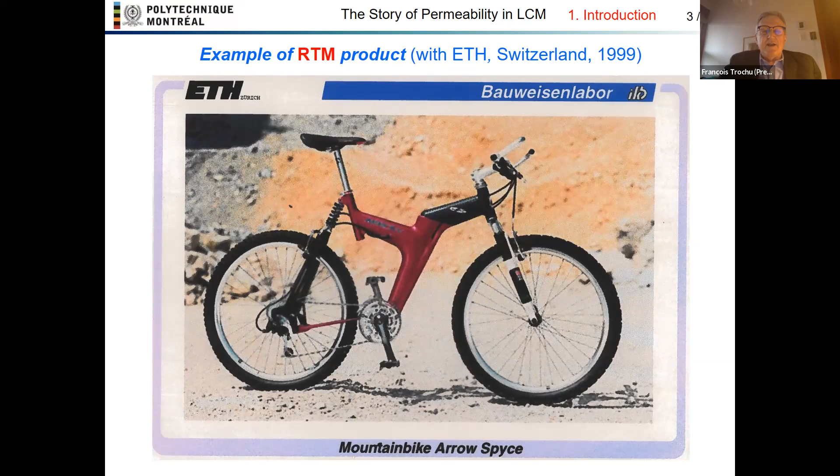Another example of a part made by RTM is this beautiful mountain bike frame, made out of carbon fibers, with the extremities here in glass fibers. This was done in collaboration with ETH in Switzerland in 1999. So let's start a little bit with philosophy, because what we always try to do in research is to model from experiment.

So the first step is observation of the phenomena. Afterwards, numerical simulation is supposed to help us validate the model and also to predict. So we come back to experiments.

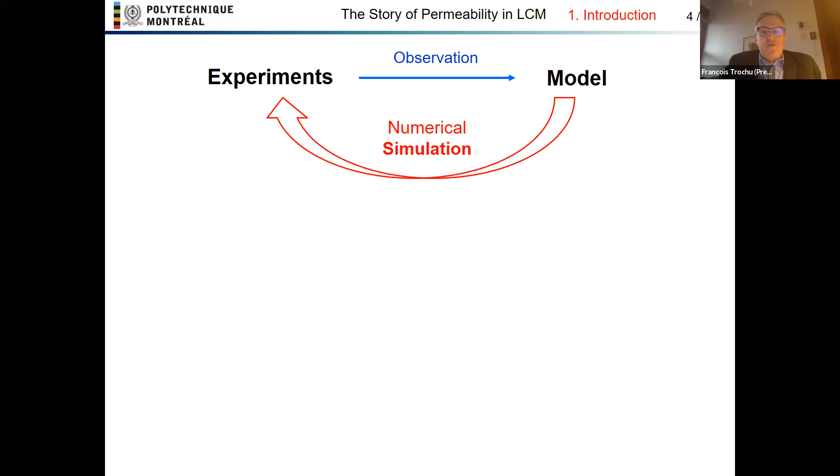So how are we going to proceed to simulate mold filling in liquid composite molding? Well, first of all, we have a mold here, schematically depicted like that. At a given time, we inject at a given pressure or prescribed flow rate, and we have an impregnated domain at a given time.

To simulate mold filling, we need to have a model. The first model that was used successfully for this work is Darcy's law. Darcy's law enables us to predict, at each time step, the shape of the flow front and its progression in time during mold filling.

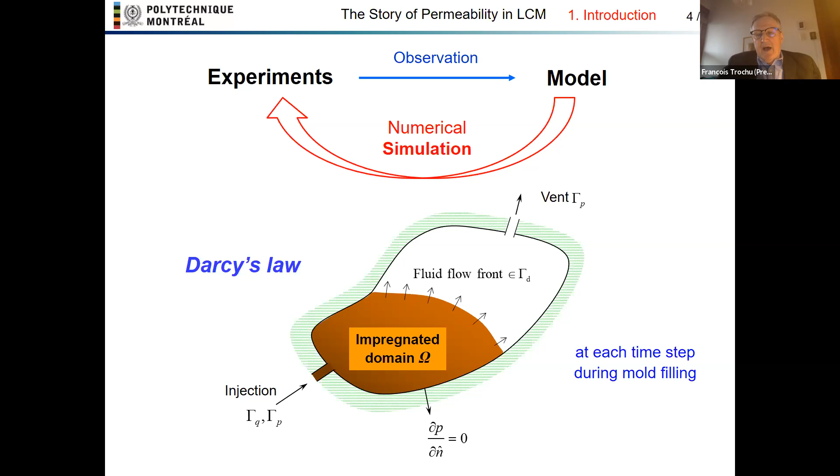Now, how are we going to present today this concept of permeability? First, we will talk about process permeability, which is different from the classical permeability - a saturated concept of permeability used in Darcy's law, especially in groundwater flows.

We will also see how this concept can be adapted to different LCM process variants, with the goal of establishing a systematic connection of permeability with process simulation, which is so important for software validation.

The background of this work is actually 30 years of research on LCM since 1990, with the previous 10 years since 1980 on groundwater flows. This is really my personal background, which I'll try to sum up in a short presentation today. At the same time, we'll try to better understand the principles that govern successful applied research.

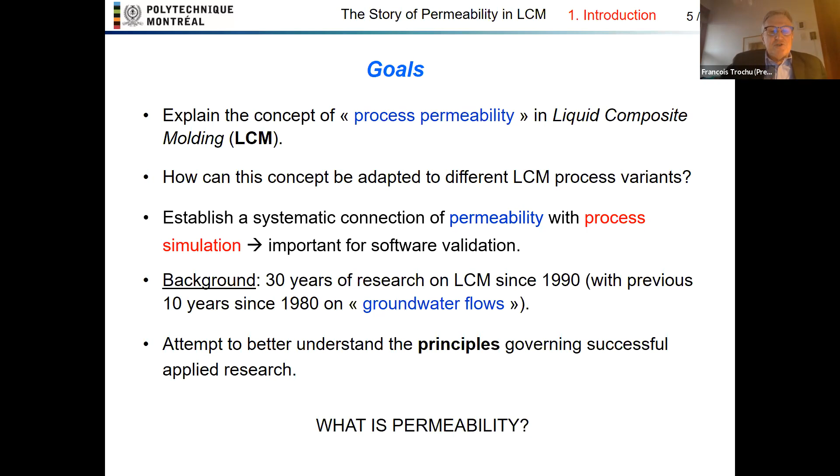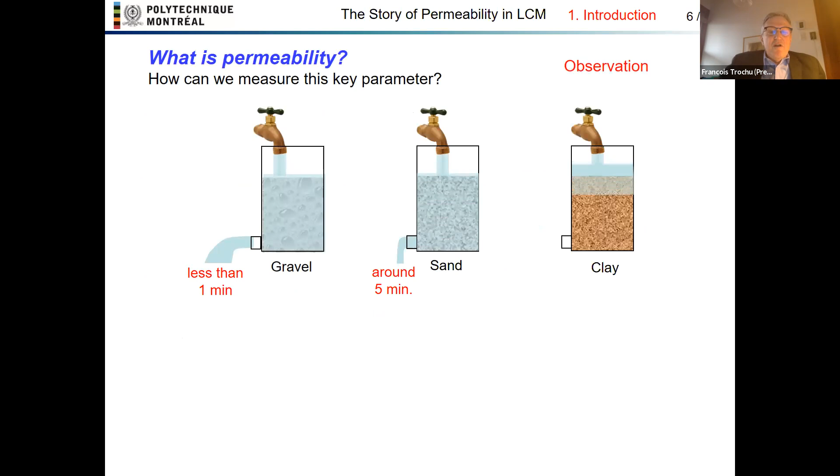So what is permeability? Permeability is a parameter that depends on how quickly you can fill a porous material. For example, gravel can take 1 minute, sand about 5 minutes, and clay a week or even more. All these factors depend on the pore size.

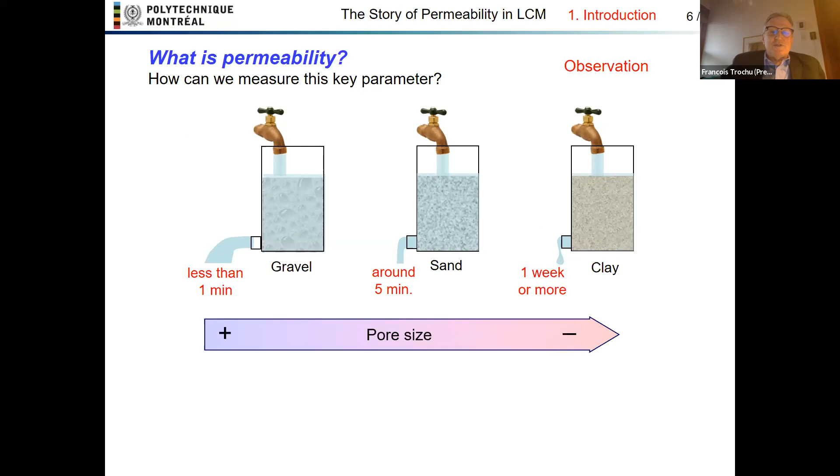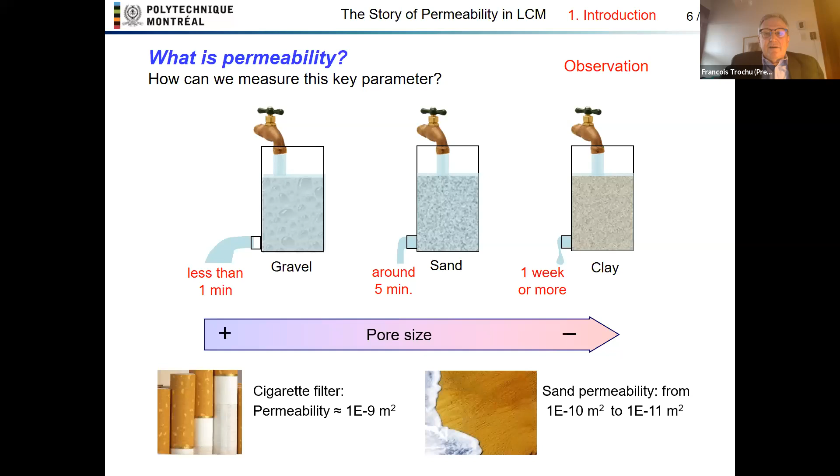You can also consider permeability when air flows through a filter, like a cigarette filter, for example. The order of magnitude of these permeabilities ranges from 10⁻⁹ square meters to 10⁻¹⁰ and even 10⁻¹¹ in the case of sand. So permeability is really connected with flow area - that's why it's measured in square meters.

Now, the outline of the presentation: we will first present Darcy's law and the basic facts connected with this fundamental law in porous media. Then we'll present the different versions of process permeability, like rigid permeability for 1D flow, the extension to 2D in the case of an anisotropic preform, together with some software validation. We will recall the benchmark 1 and 2 results.

Then we will extend this concept of process permeability to vacuum-assisted resin infusion, or what we call direct infusion - the concept of flexible permeability. Each time I will show some software validation. Then we will talk about Kz, through-thickness permeability, also with 3D software validation.

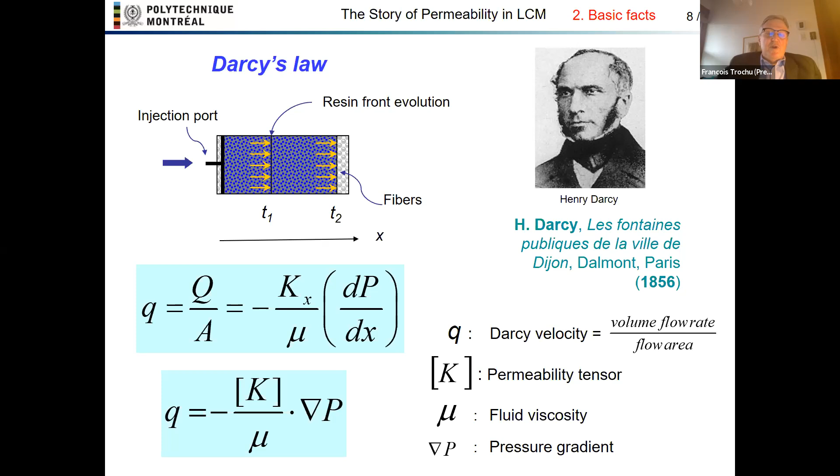Actually, this law can be generalized in vector form as follows, where Q is a vector, K is a tensor, a 3x3 tensor, mu remains the fluid viscosity, and nabla P is the pressure gradient.

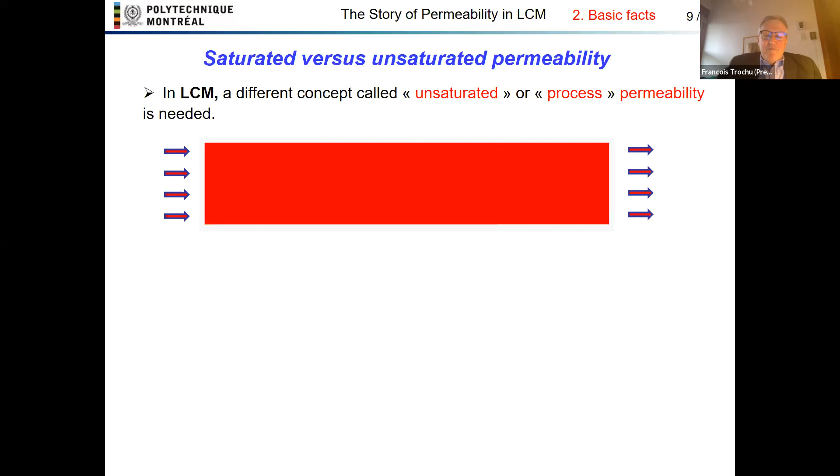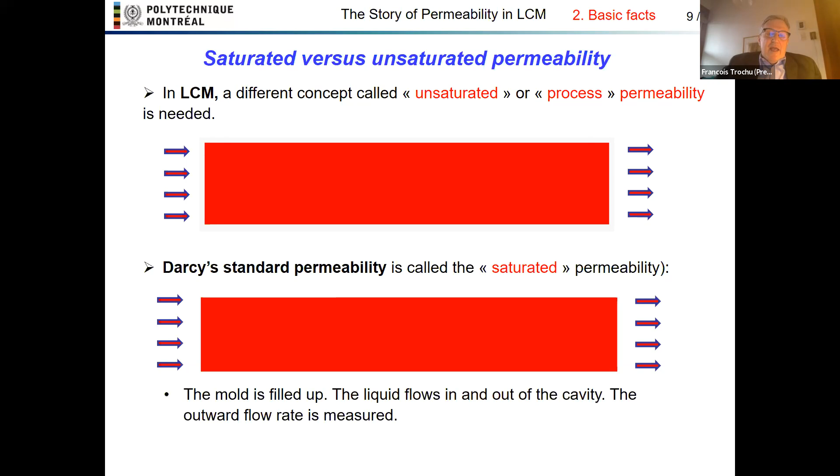So the concept of permeability here that we call process permeability is actually an unsaturated permeability, because we want to measure what happens when we fill a mold. Whereas most of the time, the standard concept of permeability is a saturated permeability, where the mold is full, and we want to study the flow rate - what flow rate comes out or gets into the mold over time. The outward flow rate is very often measured when we want to talk about saturated permeability.

So how can we measure process permeability? There are several methods that were devised over the years. The first one is the simplest approach: the unidirectional method, where we inject a rectangular mold in time.

A lot of people wanted to go faster in the case of anisotropic preforms, which is actually most preforms since they are not isotropic. They devised some molds to follow up the flow front in radial injections. So this was also done.

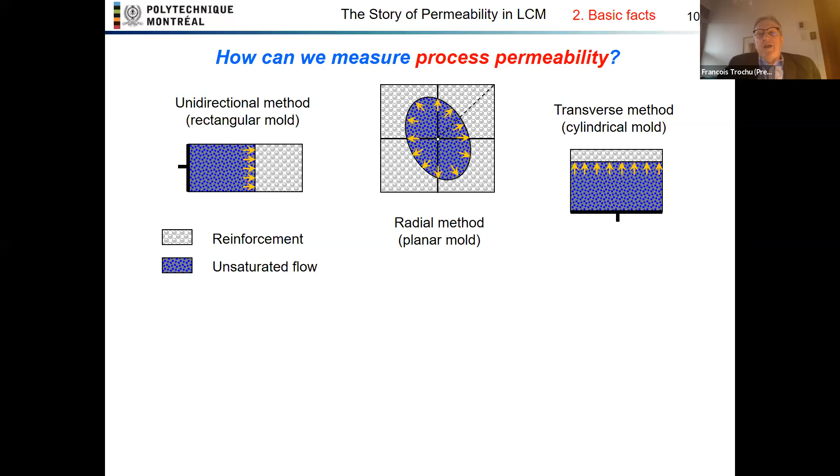In the case of transverse permeability, usually it's a bit difficult to measure the unsaturated process permeability. Usually people work with a cylindrical mold, and we measure in this case the saturated permeability.

So the different concepts of permeability here go from rigid to flexible, and then we'll talk about the connection with preform expansion, and finally apparent permeability in indirect infusion when we have a distribution medium.

So 2D in-plane radial injections, as was just described before, is really a tensorial equation here, where Q is a vector, and we have here the expression of the permeability field, where K is a diagonal matrix, where the first two terms of the diagonal are the in-plane terms of permeability, which we often call Kx and Ky, and K33 is the transverse term.

So this here is the permeability matrix in the principal axis of the flow. What are the principal axes of the flow? We'll have a look in the next slide, but before that, let's look at the case of isotropic materials.

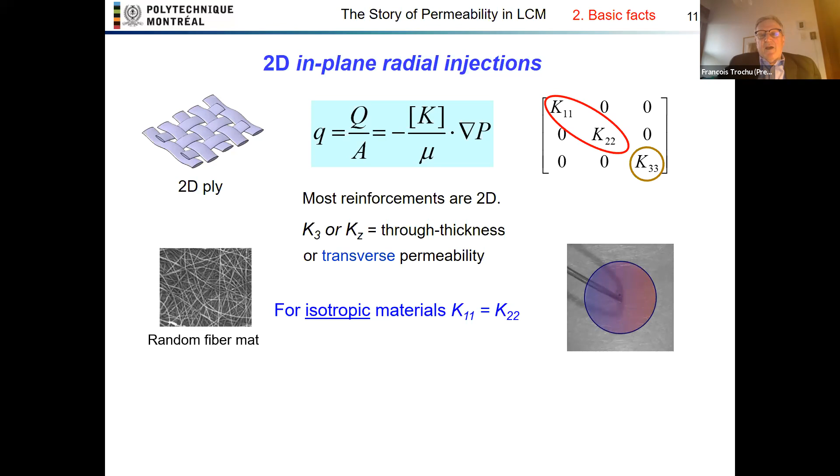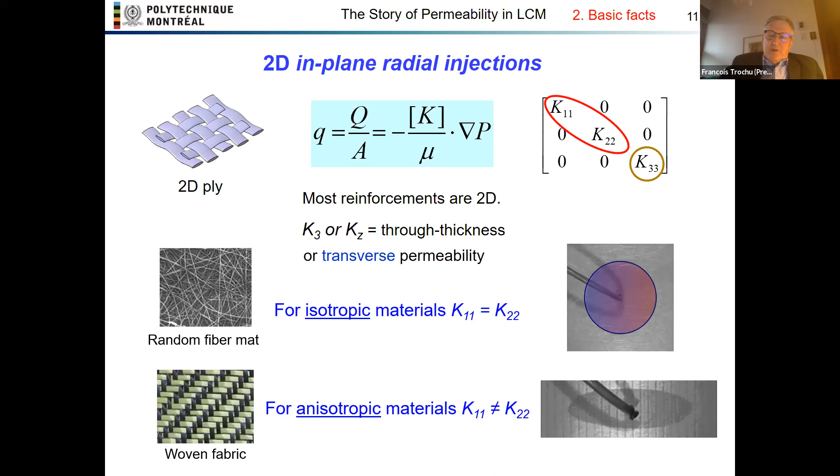For example, random fiber mats: the flow front in the radial injection is usually nearly a circle. In the most common case of anisotropic materials, where K11 is different from K22, then we have an elliptical flow front.

Now, measurement of permeability by radial injection is not easy. We tried a long time ago to relate that to 1D flow, and there are some difficulties, depending on the injection pressure, or especially if we infuse the preform.

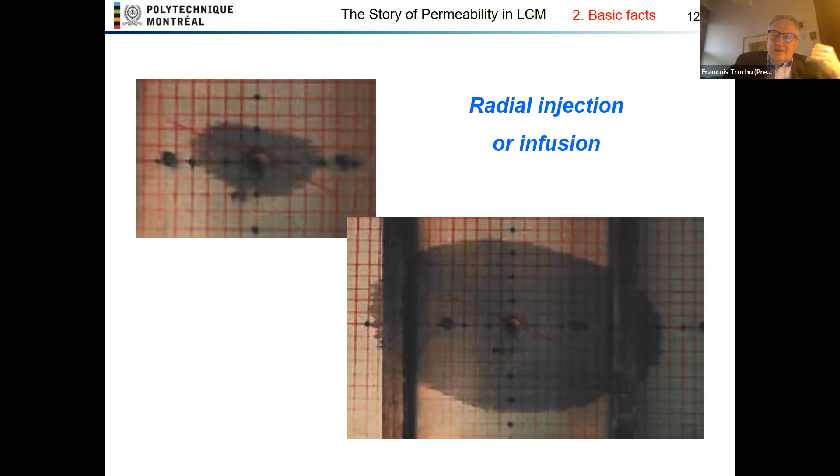At a low flow front velocity, we have a fuzzy shape of the flow front, and it's not even always elliptical, because in this example, for 2 times 80 seconds and 140 seconds, if we try to fit the flow front with a perfect ellipse, we get 2 angles which are quite far apart. The angle beta here is 16 degrees, and here is 28 degrees.

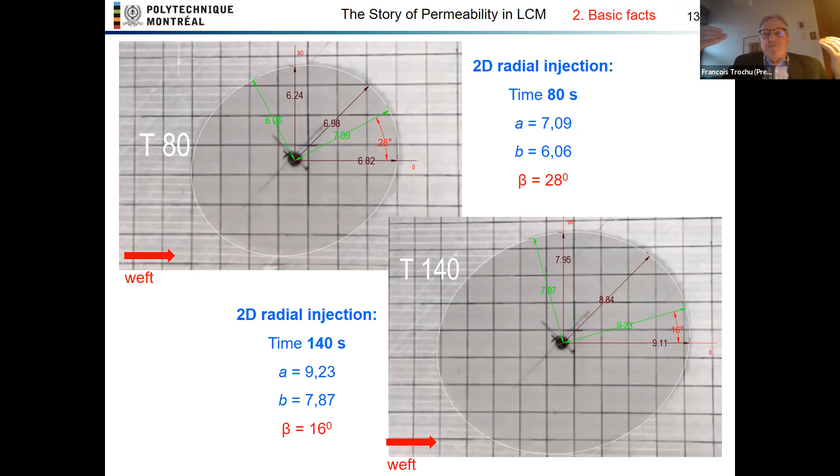So it is not easy from these kind of measurements to get a very good fit. This is mainly due to the irregular orientation of the flow ellipse, but also it is connected to the shape and size of the inlet gate. This was studied in a paper by Professor Gauvin a long time ago.

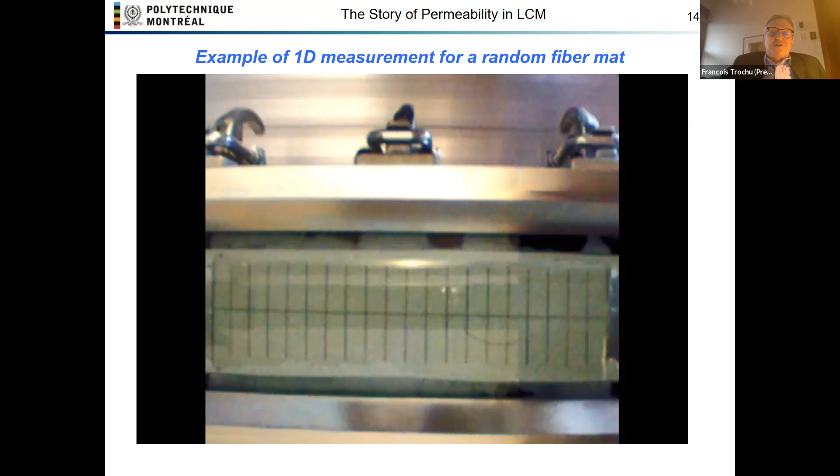So what do we do in our lab to measure permeability is really we rely on the 1D flow approach. In a rectangular mold, we measure the flow front velocity by observing under the glass cover the different crossing times of the flow front with the central line. By doing that, we are able to get reliable measurements, because with the 1D approach, the data processing is simple and robust, and most importantly, we have good reproducibility with fewer sources of error.

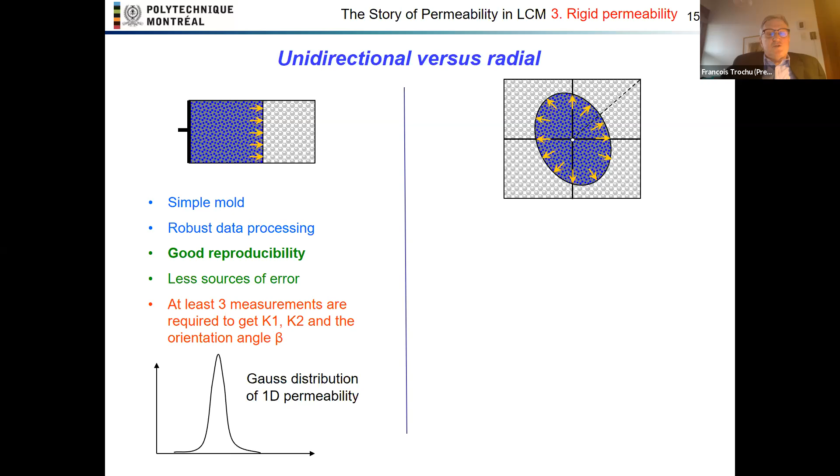However, we need 3 measurements to get K1, K2, and the orientation angle beta of the flow ellipse. But we do get a nice Gauss distribution of the permeability.

Whereas with the radial experiment, it's an expensive tool, and we have complex data processing. The principal permeability can be obtained from 1 measurement, but the reproducibility is not high, and we have also an influence of the size and shape of the inlet gate, so we get a much larger distribution.

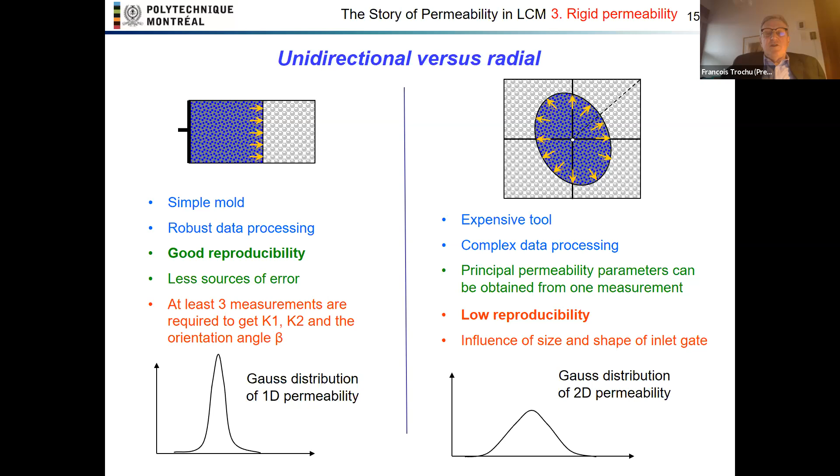We could check that by comparing our results with the results of a colleague who had such an expensive device in a research project a long time ago.

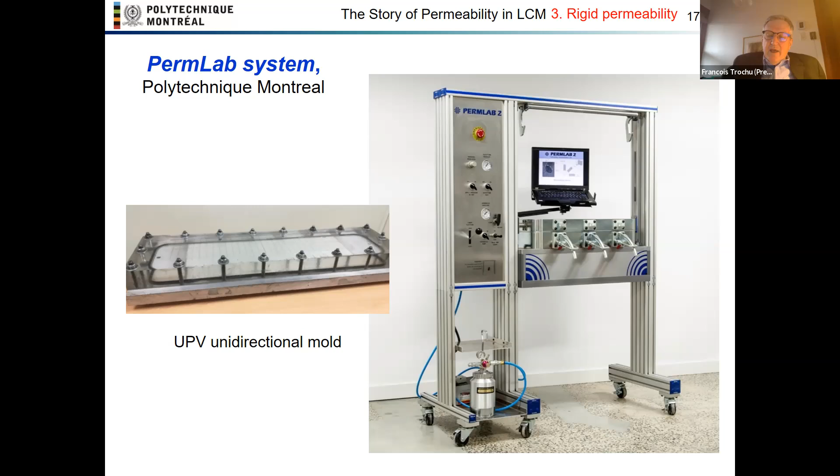So how do we measure? We have a special tool here with a glass cover, and with engraved lines on the glass cover, we can record the different positions in time of the flow front.

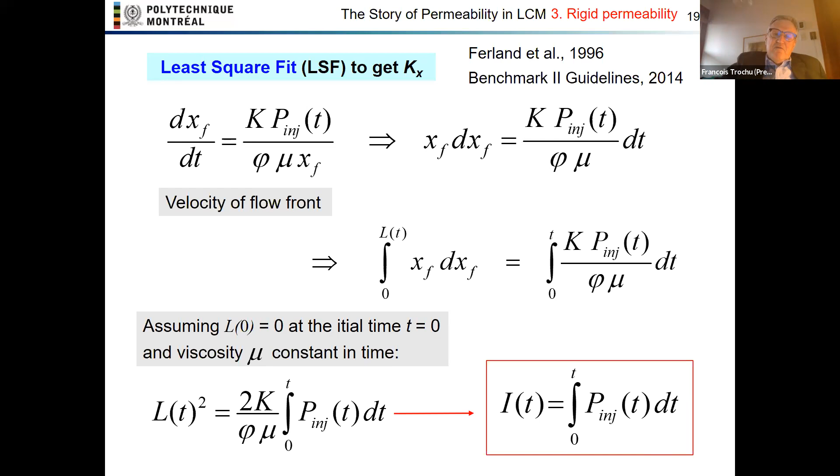I think it can be important, although it doesn't always have a very strong effect. We could neglect that, but we do it. We integrate pressure because when you want to make an injection at constant pressure, you set the pressure pot at the pressure you want, you inject, but the pressure is never always nice like here. There's always a small delay before you get the set pressure.

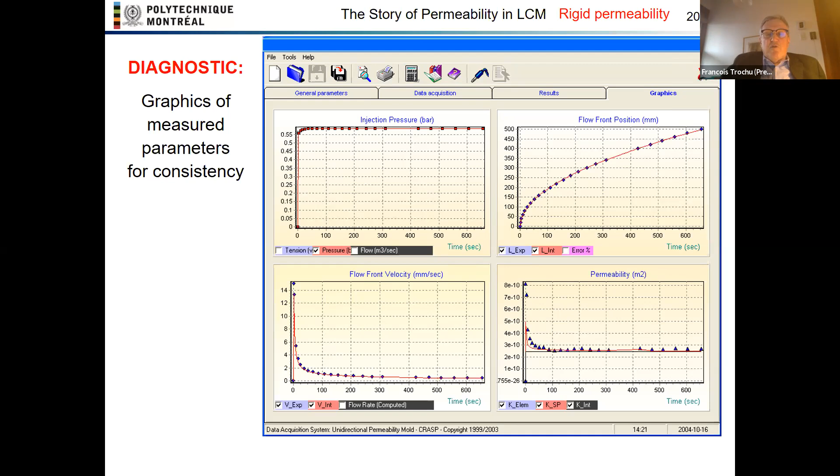And then at each position of the flow front, you can calculate permeability here. So this is permeability here.

Now, this permeability, the line that is here, is called the least square fit. And it's with this value that we calculate, in red, the position of the flow front. If it matches with the experimental positions, we can safely consider that the experiment was okay. So it's a built-in check of the measurement in 1D.

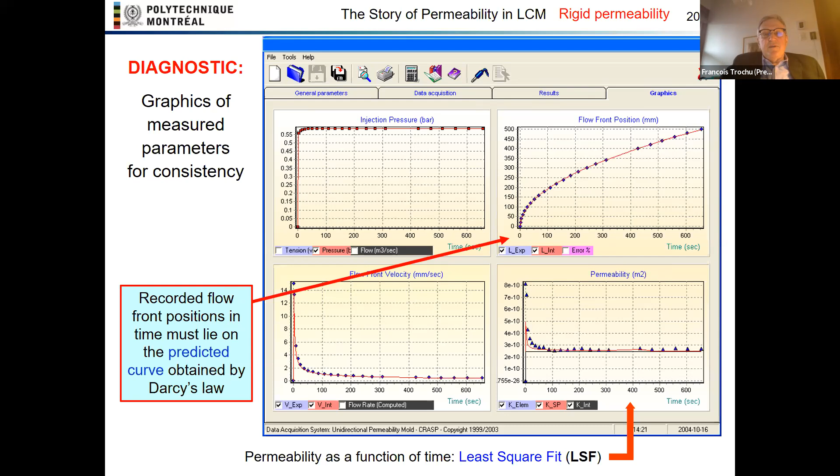Afterwards, when we simulate, we can also work with equivalent saturated permeability, like in a planar crack of thickness D, it's D squared over 12, or the classical Poiseuille tube of radius R, where the equivalent permeability is R squared over 8. Naturally, there are many equivalent formulas for different kinds of runners.

In the past, these two values were very helpful for us. We didn't really need to go to much more complex terms. Anyway, so this is the way we measure permeability.

In the end, we get a model of permeability as a function of fiber volume content, because when we change the thickness of the preform, permeability is a decreasing exponential function of VF. So a very small change in thickness will create a significant change in the value of permeability.

And this is the kind of experimental model that we get of permeability as a function of fiber volume content VF.

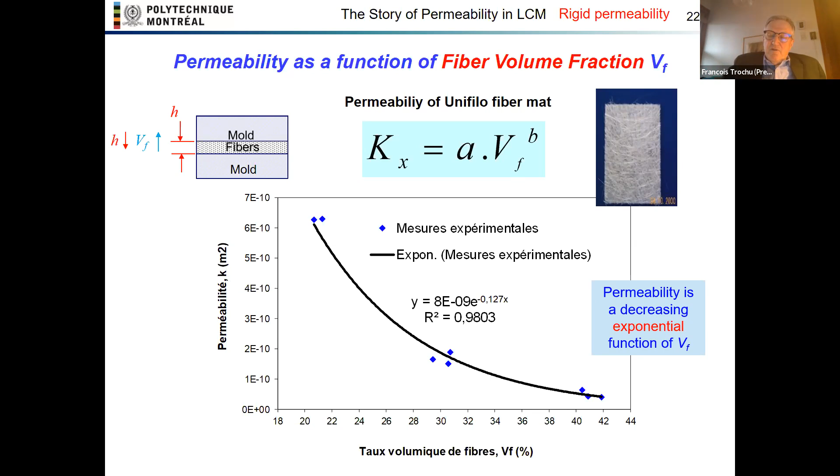Now, just to show a validation of this measurement in 1D, these are our old results, not published actually, that were obtained after measurement of permeability in a 1D mold with obstacles.

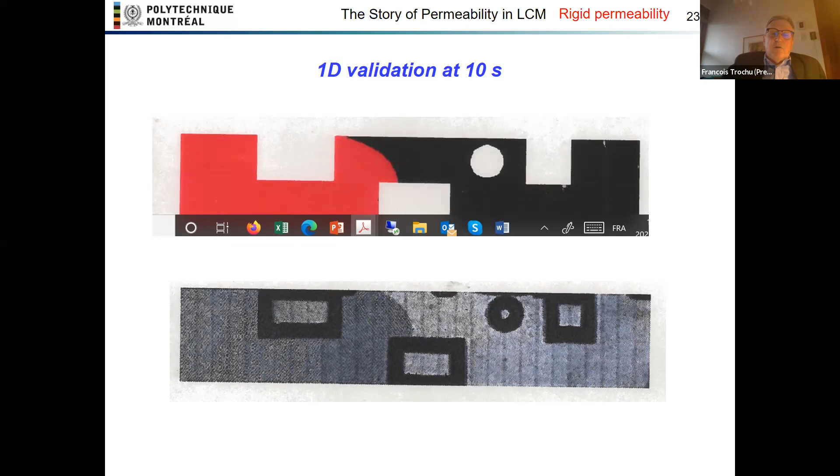So at 10 seconds, at 13 seconds, and at 14 seconds, we are really able to reproduce the shape of the flow front in time, provided that we can control the edge effects along the edges of the mold, along the edges of the obstacle here.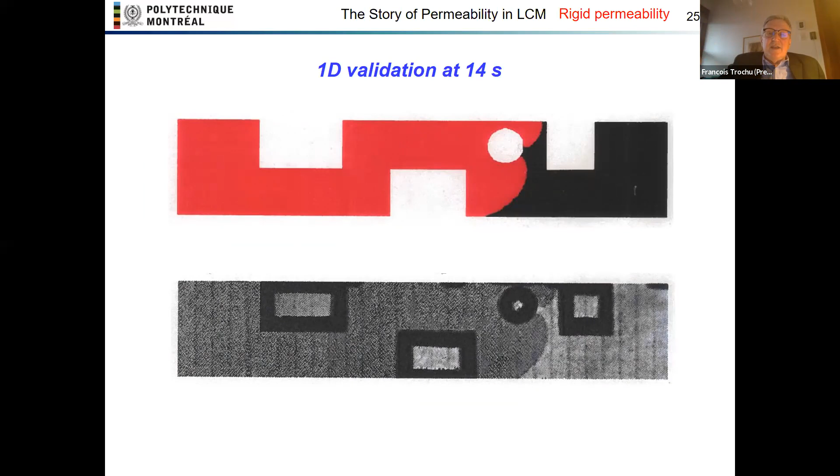So there are some experimental techniques to do that. We have to master them in order to provide this kind of validation.

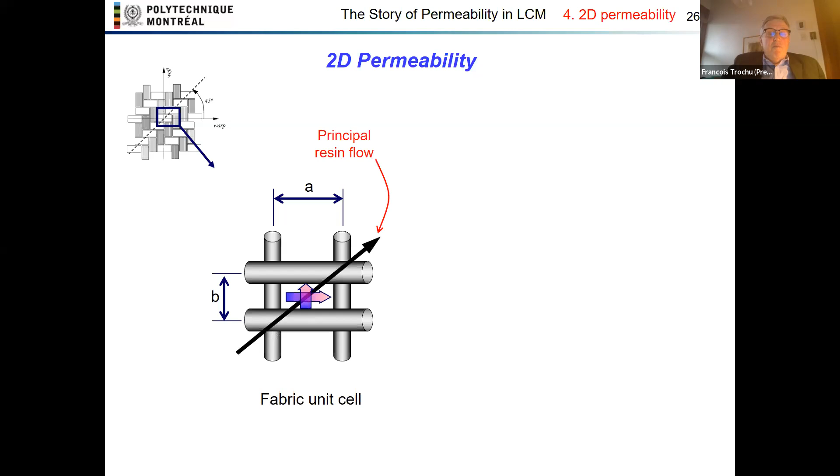Now, 2D permeability is quite simple. We have a preform with different fibers along the X and Y axis. And the flow front actually will not follow the axis of the weft and warp.

It will be at an angle beta with respect to one axis. And then we have an ellipse with K1 and K2 and this angle beta.

And the way to measure this 2D permeability is simply by performing 3 measurements along 0, 45, and 90 degrees to identify the ellipse. So how do we do that?

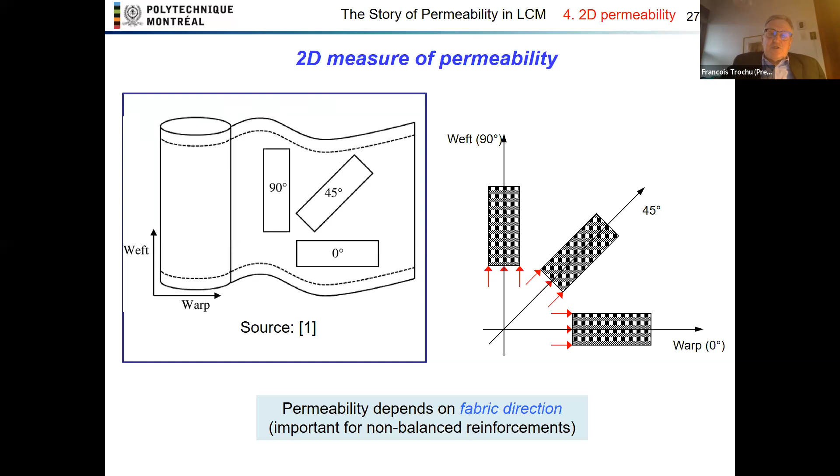Well, we follow the proposal, the work in this reference article from 2007. And from the 3 measurements that we perform along 0, 45, and 90 degrees, we have enough information here to identify the permeability ellipse and to get K1, K2, and beta.

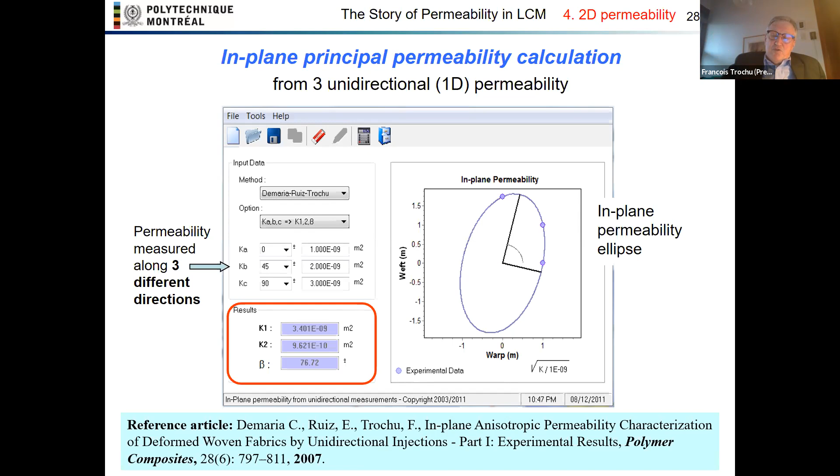So we've been doing that for years now, together with many industrial partners. It's a kind of procedure that is well validated now.

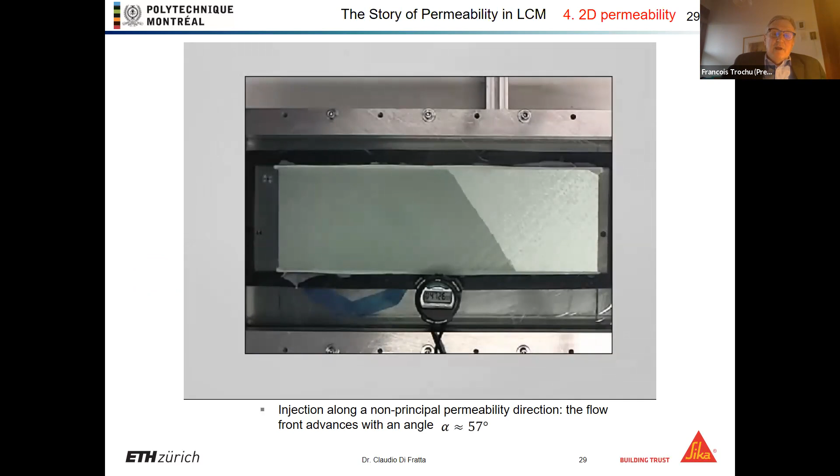Now, one interesting example here I want to show of anisotropic permeability is when you want to inject a 1D reinforcement with an angle, you don't get a straight vertical line, but you get a straight line with an angle. This angle here is 57 degrees. Knowing this angle, you can proceed faster to get the permeability anisotropic values. You just need 2 measurements instead of 3. Anyway, this was published in this article.

I think it's not easy to get this kind of flow. Really, it demonstrates the good understanding and mastery of Claudio Di Fratta, who was a PhD student in Switzerland, in Zurich, a long time ago.

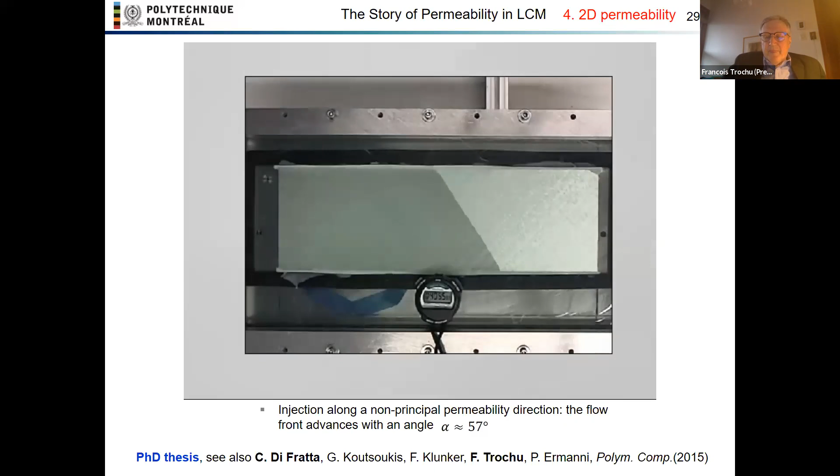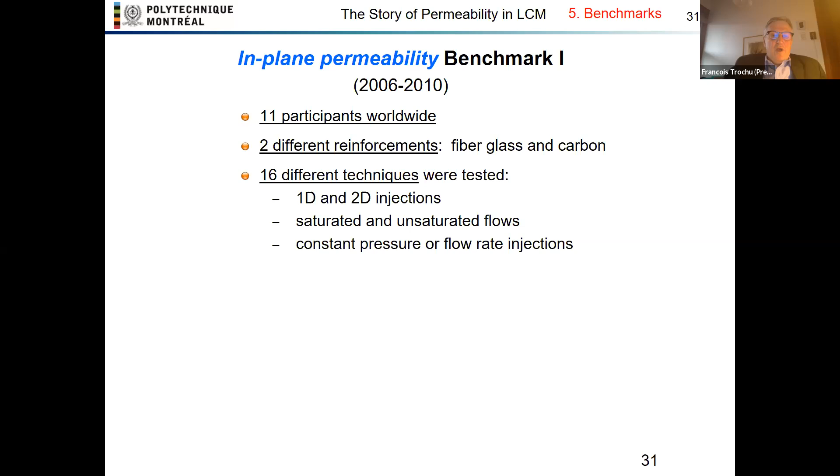Okay, now let's move to the benchmarks on permeability. There are 3 benchmarks actually. I will talk mainly about the first 2. The first one, there were 11 participants, 2 different preforms, and 16 different techniques were tested: 1D and 2D radial injections, saturated and unsaturated flow, constant pressure or constant flow rate injections.

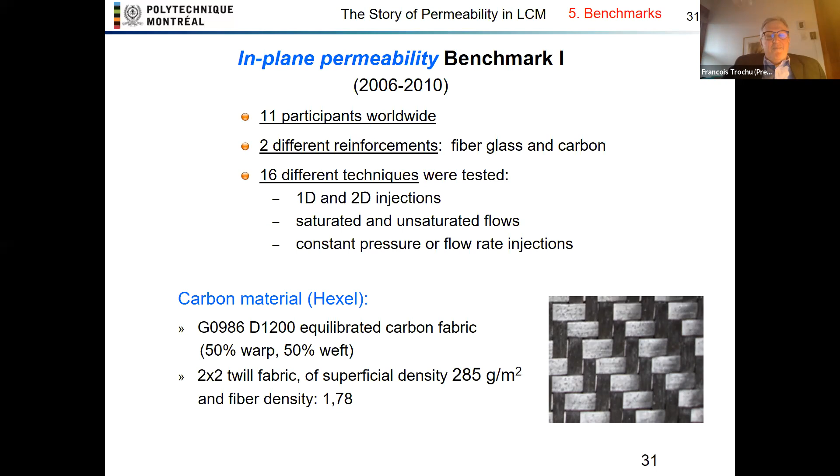This was the preform. One of the 2 preforms was a carbon G0986 from Hexel, okay, which was an equilibrated preform. However, the fabric structure made it anisotropic. And here are the results of benchmark 1 here.

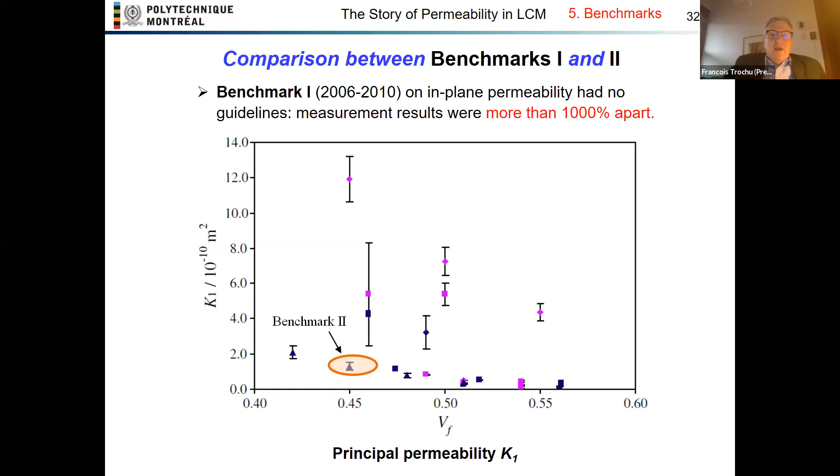You see the benchmark 1 results. Compare with benchmark 2. Okay, so why such a difference? Well, it took 4 years to complete benchmark 1. However, benchmark 2, with 13 participants, supported again by Hexel, took 3 years to complete the work with all the different universities.

Here are the 2 universities where I'm working, actually, collaborating also with Spain here. The guidelines, okay, were adopted by all participants, nearly all, actually. A rectangular mold. We wanted to have a length over width larger than 3 and check that we don't have, let's say, more than 2% of change here in thickness.

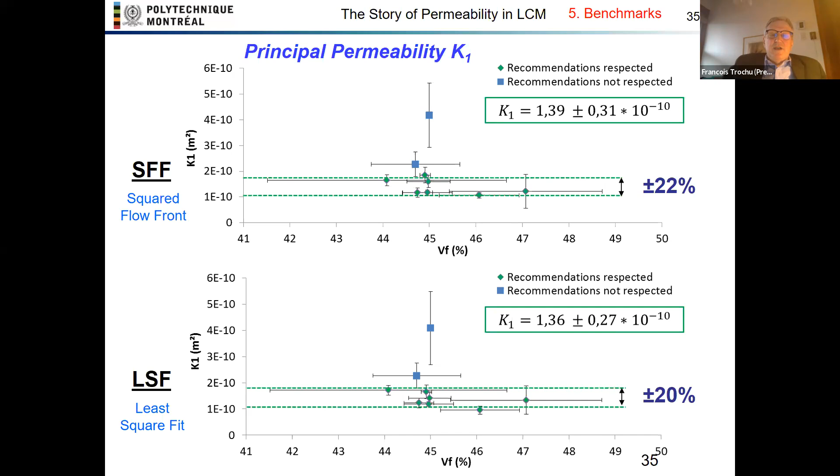And we performed 3 measurements according to the article, and we follow the guidelines actually described in this article of 1996. Now, the results of benchmark 2 are here. I just presented the least square fit here before. The least square fit results are apart, plus or minus 20% apart, compared with a 14 times difference with benchmark 1. However, there are some participants here who are not in this range because they could not respect fully the guidelines.

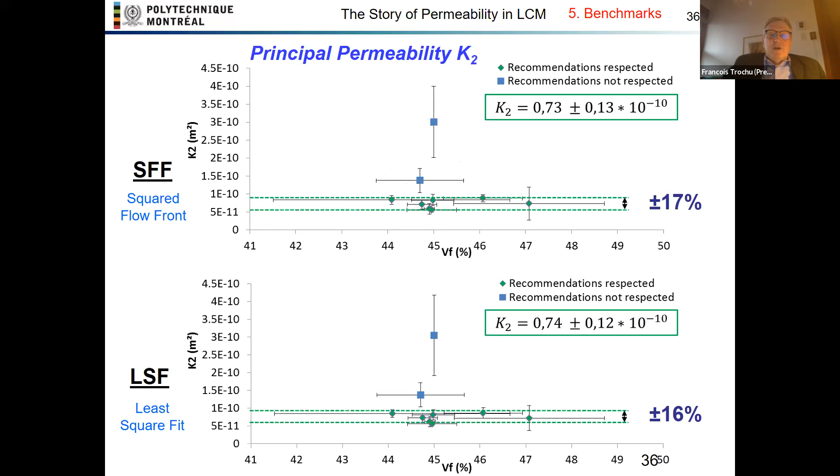Again, for principal permeability K2, we have also a good result of about plus or minus 16%. Again, some participants are out of the bound. So this demonstrates that without guidelines, the results are really in a very wide range. However, if we are careful in the way we measure, we can have consistent results, because we know that the preform material has a certain variability, and let's say plus or minus 20% is not bad given the number of participants.

In our lab, with a good specialist who knows really how to take the measurement, we can be around, let's say, a maximum of 15%, or even 12%. But with the whole team, we had to be around 20% maximum.

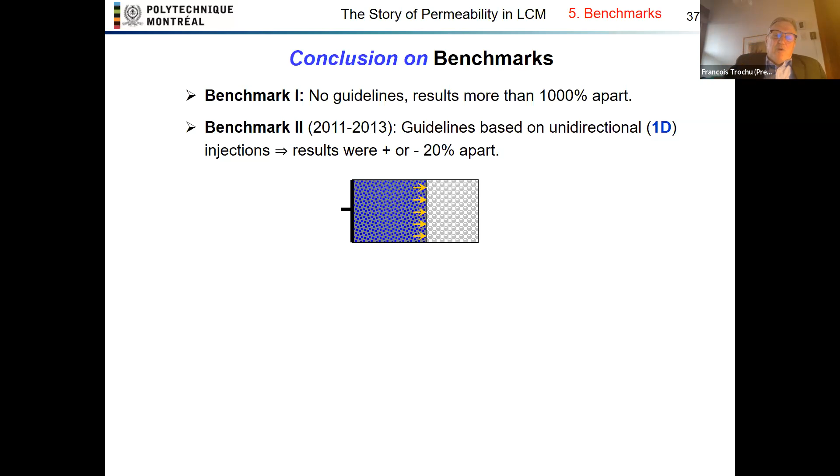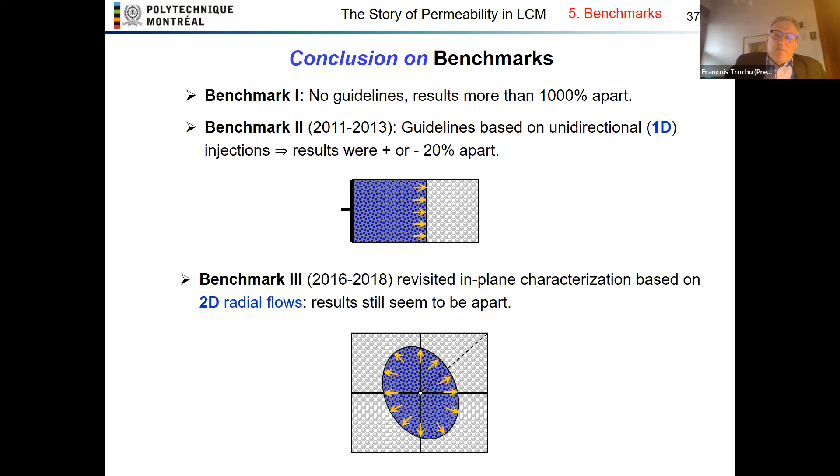Benchmark 3, people wanted to perform another benchmark. We didn't take part. Between 2016 and 2018, there was a revisited in-plane characterization benchmark based on 2D radial flows. I didn't look at all the details. What I saw is that the results still seem to be apart. We didn't take part, and I didn't really make a thorough analysis on that.

Now, let's talk about how we can extend this approach to measure permeability to vacuum-assisted resin infusion. VARI is when we inject under a membrane here. We seal the edges and we pull vacuum. And the resin pot normally should be under the table of infusion. The resin will flow through the preform, pulled by the vacuum pump.

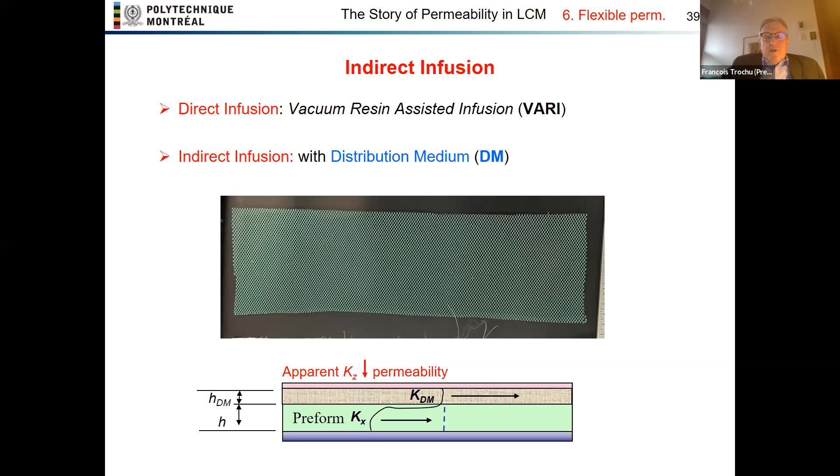So how does it work really? Contrary to most resin infusion processes, which are indirect infusion using a distribution medium that results in through-thickness flow, some people have developed special reinforcements. Sometimes you can even use a standard reinforcement to perform a direct infusion without the distribution medium. So let's see what we can obtain without a distribution medium.

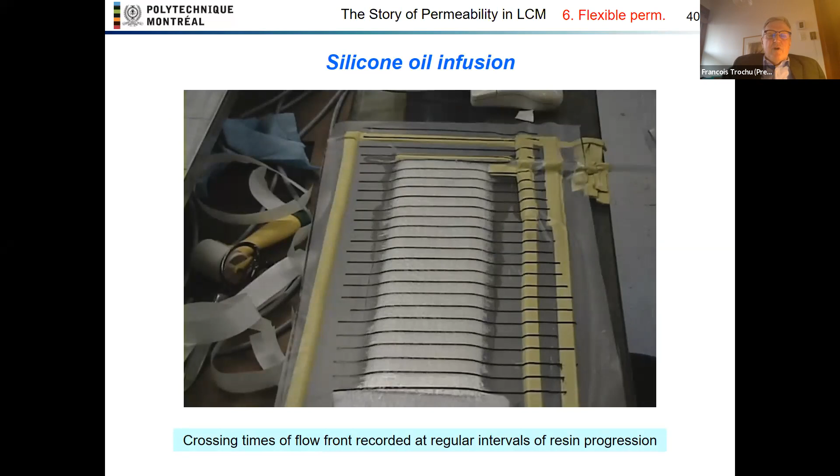Here we measure what we call flexible permeability in the same way as rigid permeability, except that we perform a flexible experiment under vacuum. By doing that, we were able to check with the industrial partner, Kaizen Technologies and Fibres Design, in 2001, that we could get a really good reproduction of the shape of the flow front in time.

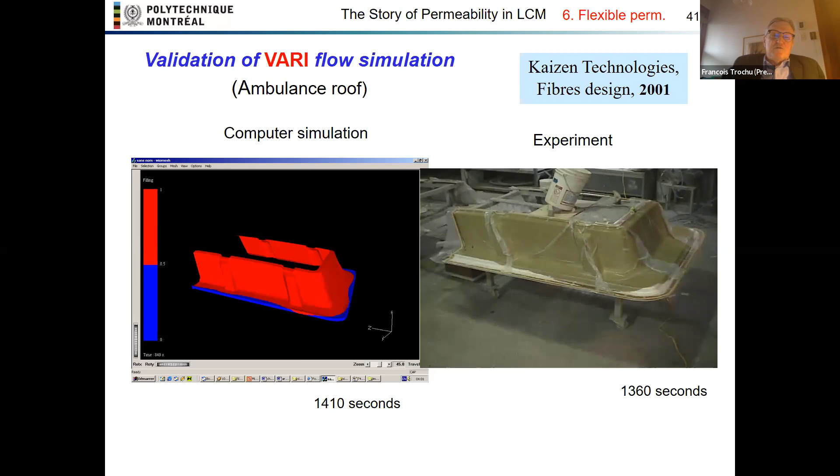It was infused from this line down to this vacuum line here. We could even have a good comparison between the calculated and experimental fill time, with a difference of less than 3.5%. And we could even do something more.

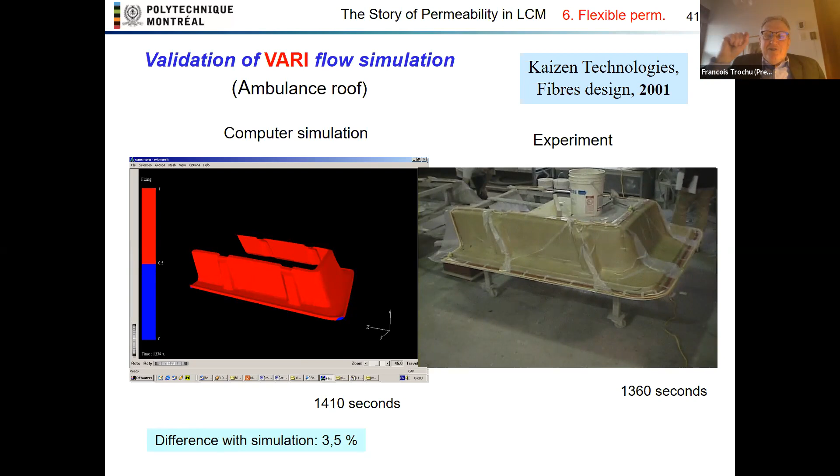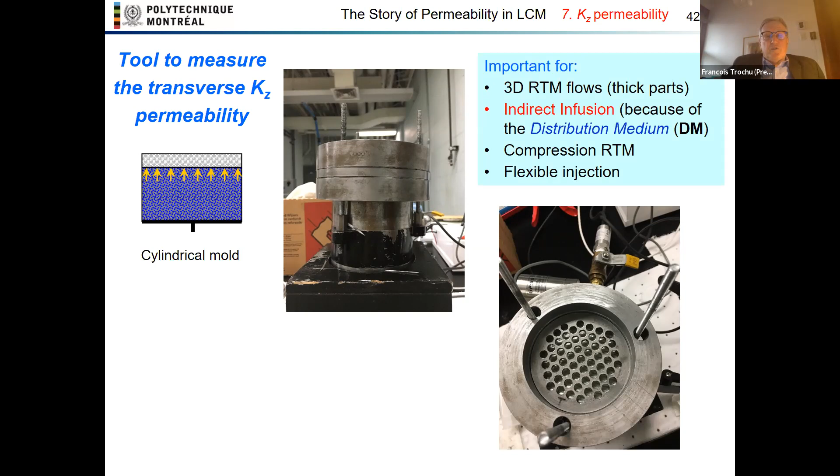Now, KZ permeability, or through-thickness permeability, can also be important. There are different cylindrical tools to measure KZ permeability, and different people have different approaches. There was a benchmark on which we worked with many other people, because permeability can be important in the case of thick parts, also in the case of a distribution medium in resin infusion, in compression RTM, and in flexible injection. So we believe flexible injection is important.

So we took part in this benchmark. And after the benchmark, we realized that there was a lot of inconsistency in the results that came from the design of the tool itself.

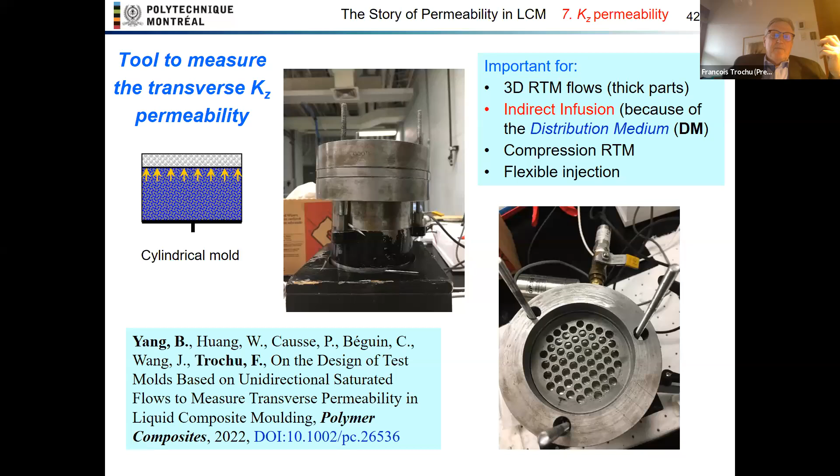So we prepared a first paper, now published, on the design of test molds for cylindrical injection. There's a second one that should be submitted soon on the data processing. By establishing a correction procedure on KZ measures, we could relate very well the results obtained in the benchmark in Montreal and in Wuhan, China. So I think this can be an interesting approach.

Now, a validation of 3D flow was done using the PhD thesis results of Joël Bréard from Le Havre in France, where he performed experiments in a preform that was nearly isotropic in the in-plane direction. However, through the thickness, the flow front was different - it was more an ellipsoid. By measuring through-thickness permeability and comparing with simulation, we could get a really good comparison between the experiments and the predicted flow front in this cavity.

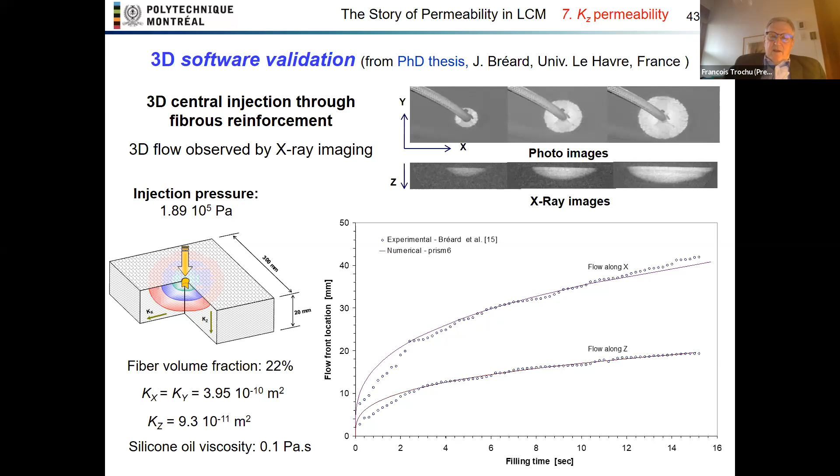So, regarding flow simulation, we have shown some validation, and we have shown different LCM process variants for permeability, which are adapted with different injection approaches. But there is a very key issue concerned with simulation.

If you want to solve a mold filling problem, usually people use the control volume approach, in which around each node you construct, as shown in red, a control volume, and you impose the conservation of the resin volume flowing through that control volume in the equations of the approximated model. So this is the standard approach: control volume with an approximation of the pressure field at the edges, at the nodes of each triangular element.

So this is the conforming finite element approximation. Here you have a pressure field basis function, which is 1 at node J and 0 at nodes I and K. And so around the triangle, you have three such basis functions.

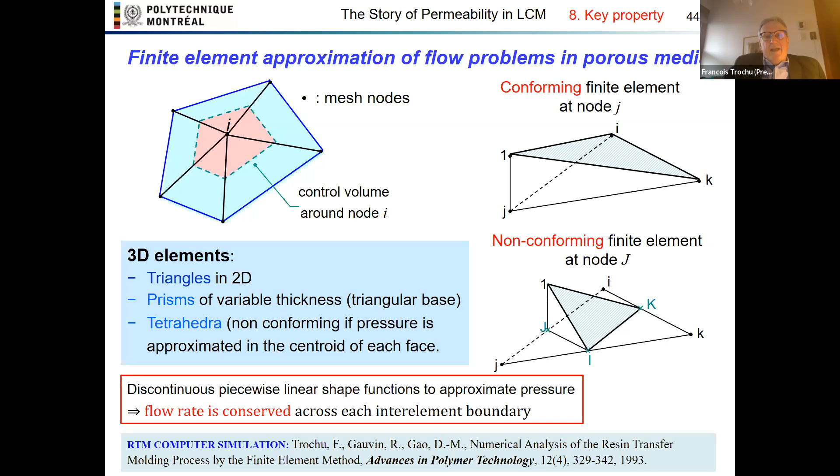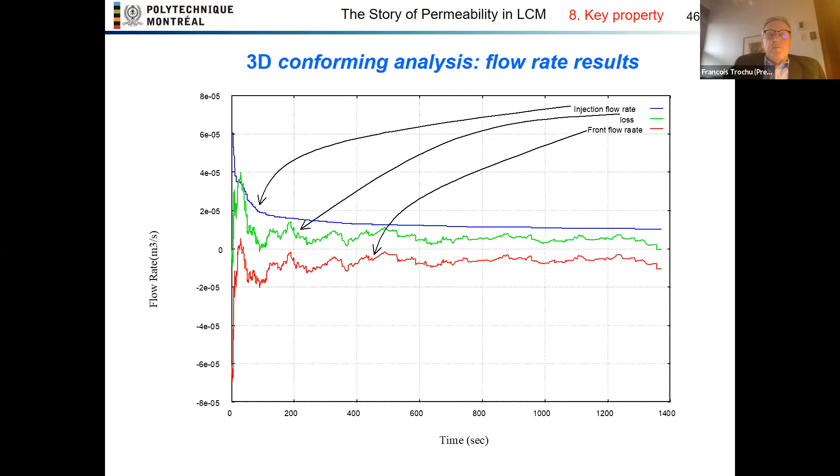This here in red is the flow rate across the flow front at each time step. And in green, you have the difference between the two. You see that it oscillates with conforming elements. Whereas with non-conforming elements, this is the injected flow rate, this is the calculated flow rate across the flow front at each time, and the difference between the two remains 0. So the flow rate is perfectly conserved.

And this is very important for RTM flow simulation, because there are always some edge effects in the mold. In order not to have to refine locally the mesh, it's much easier to work with this kind of approximation.

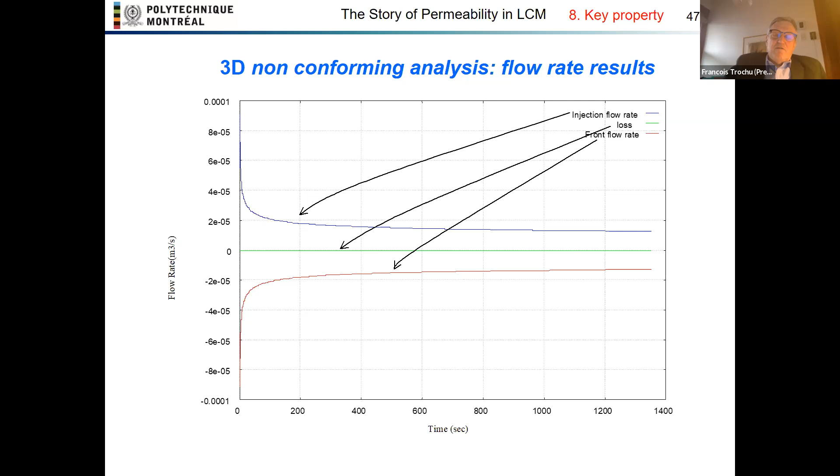Now, let's go to direct infusion. If we want to refine the concept of flexible permeability and predict the variations of thickness of the preform, we have here an experimental setup where we infuse a rectangular preform. We have pressure sensors under, and LVDT on top of the preform, okay?

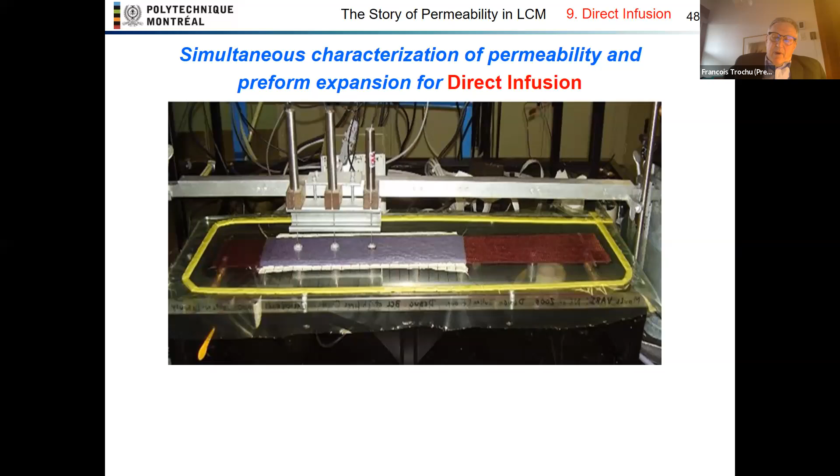And by doing that, all that work was published in Polymer Composites actually very recently. It was just accepted a couple of days ago, okay? And how does it work?

Well, first of all, what happens in resin infusion? At the beginning, the dry reinforcement, when we have a fiber bed infused under vacuum, the external pressure is the atmospheric pressure, PA. We have a vacuum pressure inside. So when the reinforcement is dry, the compaction pressure on the preform is P vacuum.

However, during resin infusion, PA minus P vacuum is the pressure driving the flow. According to Terzaghi principle, PA, the external pressure, is equal to PC, the effective pressure on the preform, plus P, the pore pressure. So when the pore pressure increases during infusion, that means PC will decrease. That means the thickness will increase, and permeability will change.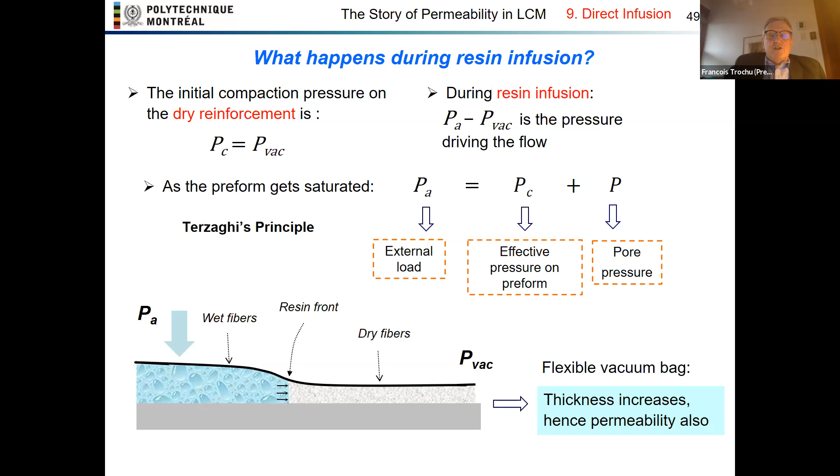So in order to model all that, we have here a 1D testing bench with 3 LVDTs and several pressure sensors. And by analyzing the results of this experiment, we also have a balance where we measure the flow rate in time, Q, okay? Because we want to perform first a direct infusion, and after some time, we let the saturated flow establish itself.

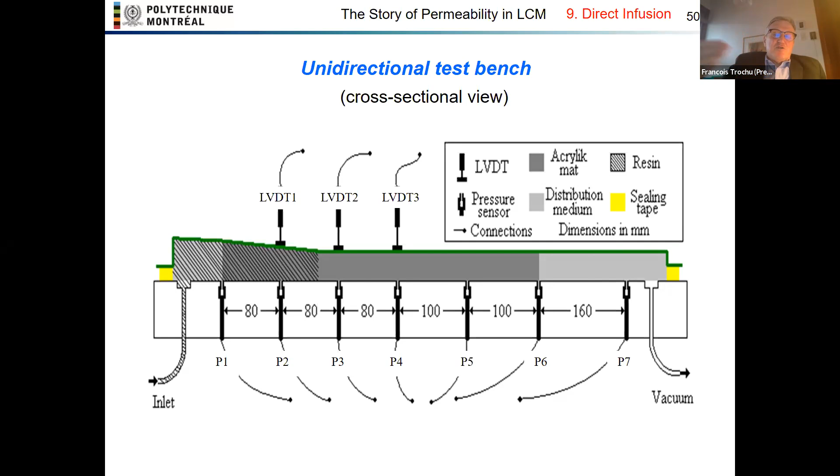And by doing that, we're able to get the thickness shape of the preform, okay, in time, when everything becomes stable in the saturated flow. This here, normally it should be negative because it's vacuum pressure. So this is the vacuum pressure here, which goes from 0, the atmospheric pressure at the inlet, to -70 in this experiment.

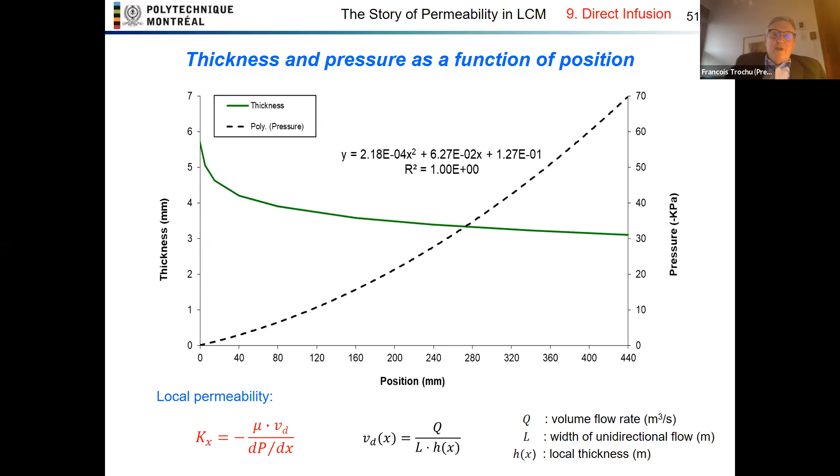And this allows us to get H at each position here. Having H, we can calculate Darcy velocity. And from Darcy velocity, we get permeability. So by doing that, we are able to get a full permeability model that in all the experiments we perform at vacuum pressure of -70, -50, -30, all the permeability models we get superimpose.

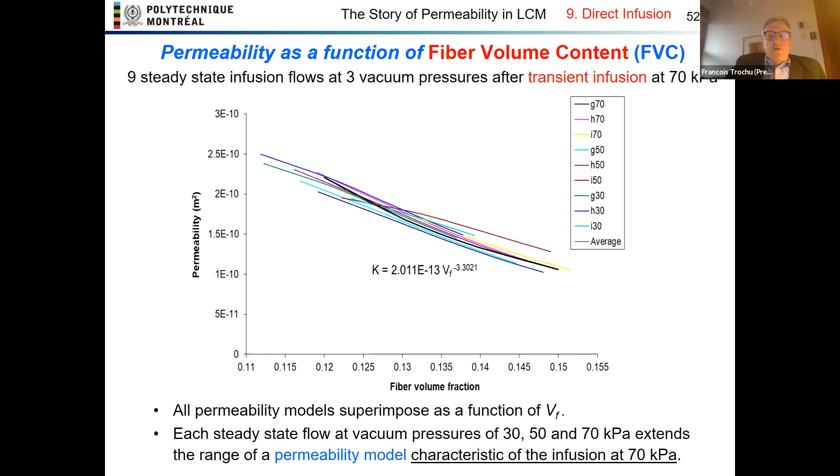But what is, I think, quite important is that we predict also the thickness variation in time. So these are the results for the thickness variation for the injection of a rectangular part of constant or varying thickness. We also worked on a part, a real part, an automotive hood for this model. So this allows us really to get a way to predict in more detail what's happening in direct infusion.

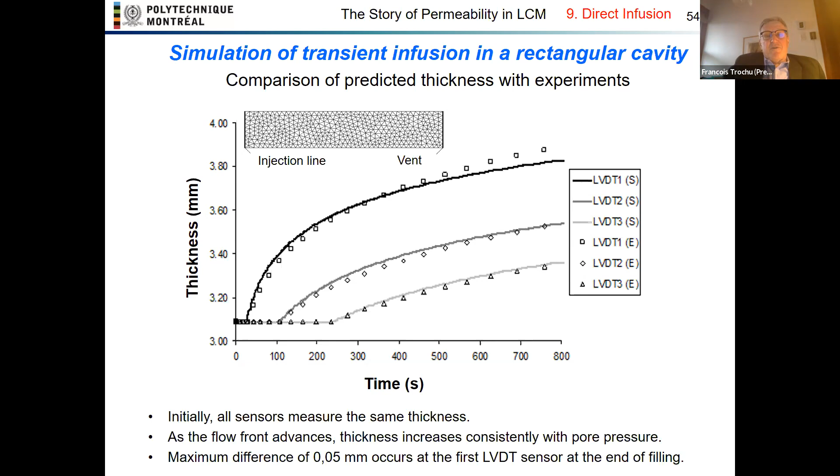For example, when people want to use a Chomarat kind of reinforcement in which they have built-in flow channels that allow you to perform an infusion without a distribution medium, we can refine here with this kind of characterization experiment, we can refine all the modeling.

Now, very important, indirect infusion. You have here an experimental setup, a typical setup for resin infusion, where you have here in green, the distribution medium with lines, equidistant lines drawn on it.

You have this position under the distribution medium, you have the preform, okay? And you have the vacuum line here. And what do we do there?

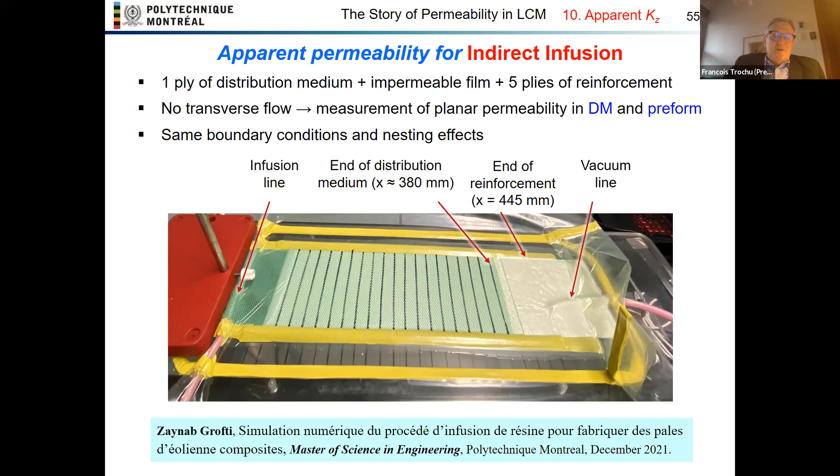Well, this was all developed in the master's degree of Zaynab Grofti. We have this kind of experiment that we perform, which is pretty easy because we have a plastic film in between the distribution medium and the preform, so that we can measure by filming the top and the bottom the actual flow. We can film what's going on here.

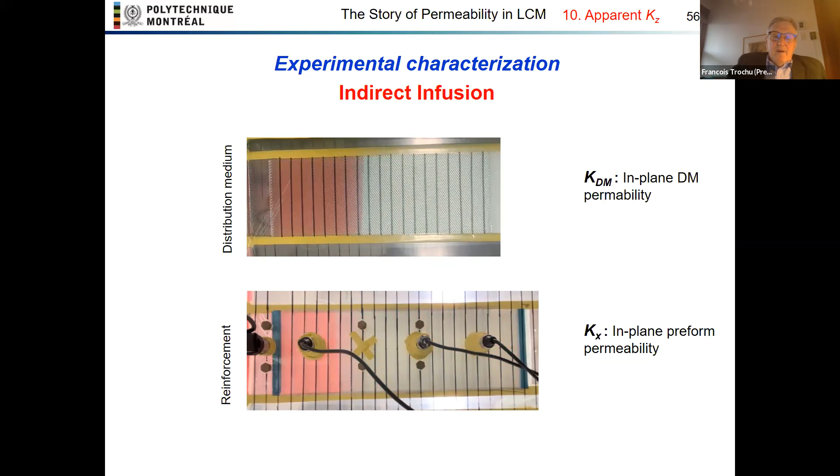Let's say we can film what's going on in the distribution medium and in the preform, independently from the through-thickness flow. So always with the same approach as for the 1D rigid flow or flexible permeability 1D, the same approach will give us a way. First of all, we get K in the distribution medium, then we get Kx in the preform, independently from the through-thickness flow. With these values, using the software PAM-RTM, we can identify a transverse permeability Kz, which we call the apparent permeability.

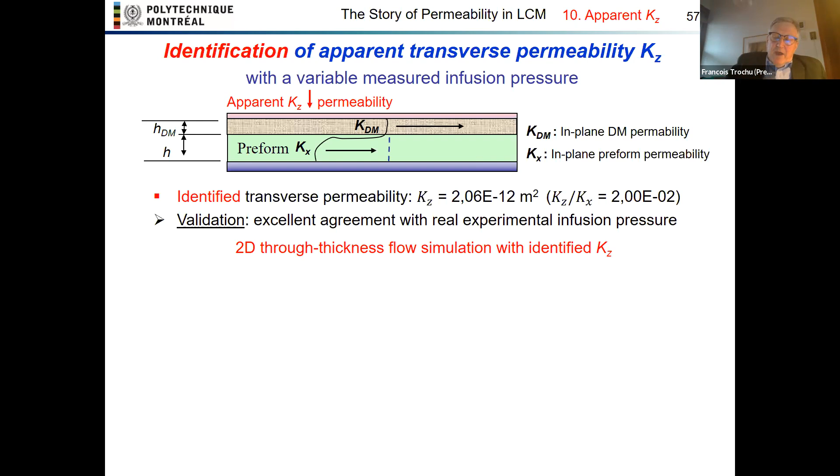And the through-thickness flow that we can then simulate with the software will give us these results, which superimpose completely the flow front position in time in the distribution medium and in the preform. So that means we have a way now to identify a through-thickness apparent permeability that allows us to simulate the flow in

resin infusion with a distribution medium, and what's left now is to apply that to a real part. So if some people are interested, I would love to do that. I think it would bring a great, simple improvement, because what most people do, they try to guess a flow, an in-plane equivalent flow permeability. To my knowledge, many people try to guess the permeability that could be used for this kind of simulation. So anyway, we have to move on.

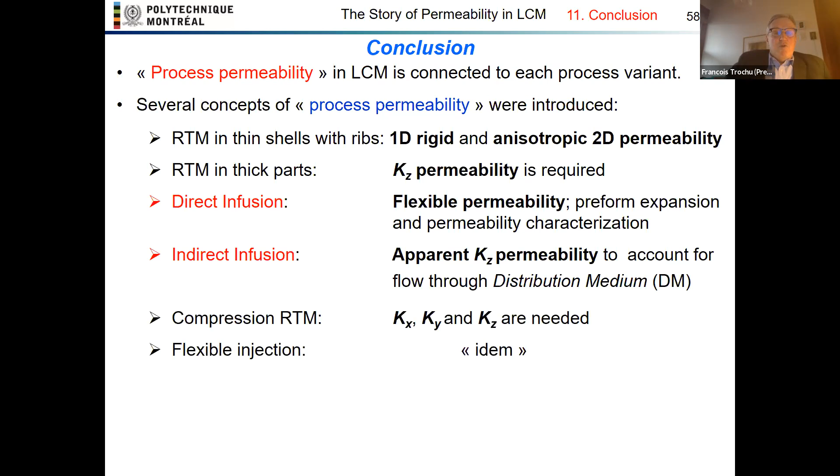We have to conclude. Process permeability in LCM is connected to each process variant. Several concepts of process permeability were introduced, like 1D rigid, 2D, anisotropic permeability. In thick parts, we need Kz permeability. For resin infusion, we can work with flexible permeability, or in the case of a distribution medium, with apparent Kz permeability. Now, in compression RTM, which is used a lot for nearly flat parts in the automotive industry, we need actually Kx, Ky, and Kz, same in flexible injection.

So the concept of process permeability allows validating process simulation. Conducting simulations with experiments is the best way, in my opinion, to move faster forward. And finally, we must never forget that the simulation we use must respect the conservation of the liquid volume injected. So thank you very much for your time.

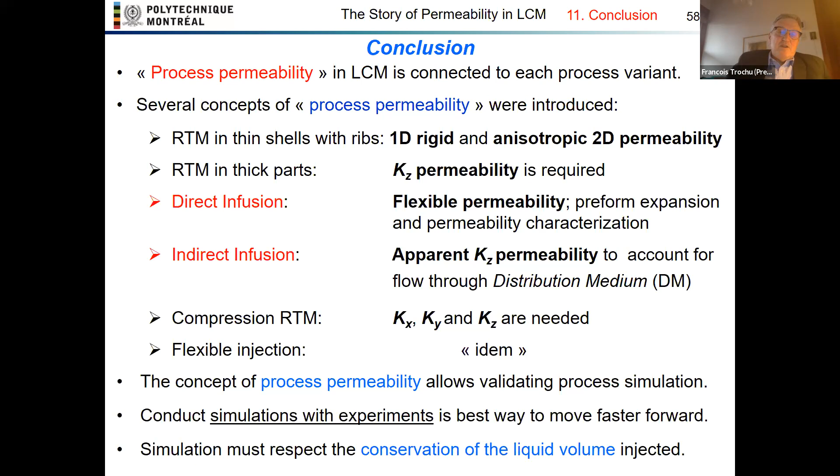I would like to show that you will have these references for 1D, 2D permeability measurements. They will be available if you download the file. We also have this concept of apparent permeability that was developed in this article here. No, sorry, in this article it is the preform expansion model connected with permeability. And in this article, we work on Kz permeability.

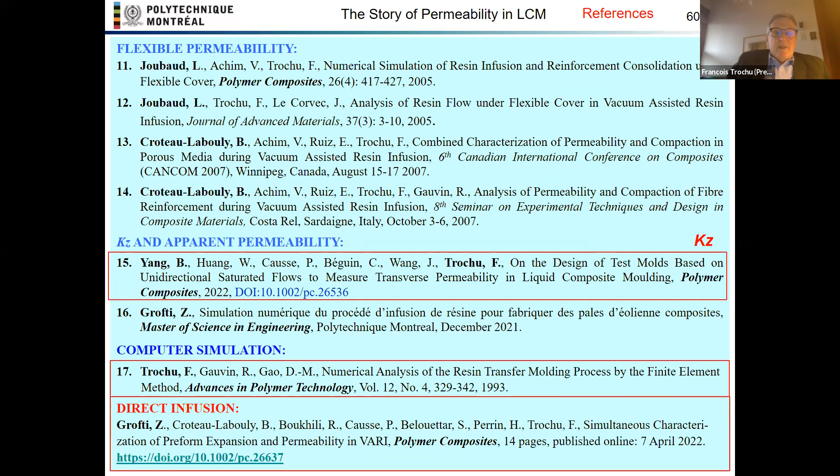So we have time, I hope, for questions. Thank you.